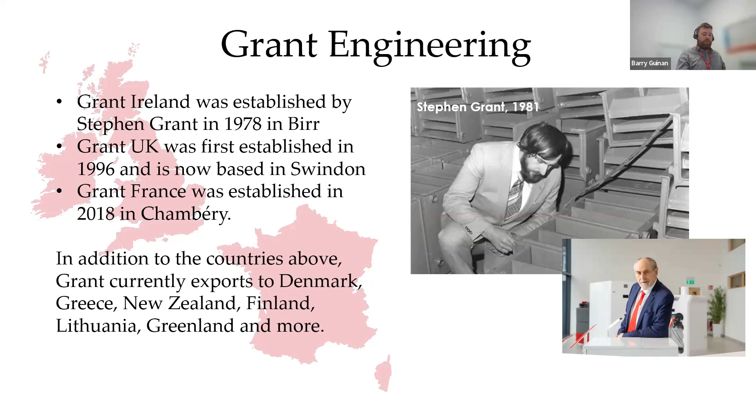First off, there's information required from the assessor. From your perspective as the assessor, you've gone out and done your pre-BER work and your assessment on the house. You've seen where the house is, in terms of what the existing HLI is, and then in consultation with the homeowner, you discuss what works are needed from a fabric point of view to get it up to the required HLI. Once you have your finished works BER at that stage, we need as a heating design company certain information in order to complete a full heating design for that homeowner.

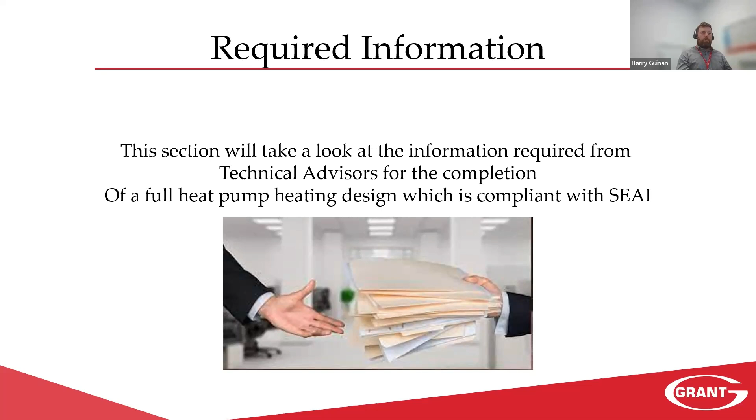The first and foremost thing we need when it comes to doing any sort of heating design is a set of plans. Now, I know from a retrofit perspective, plans are not always available, so a fairly detailed sketch is adequate. Once we can see the room layouts, the room names, the external walls, and what rooms are adjoining each other internally, that's good enough for us. It doesn't need to be a full-on CAD drawing, but if we can get something as detailed as what's on the screen, that's ideal.

You'll be doing your sketches on site anyway, so if those sketches can be provided, that is a great assistance to ourselves - we'll see as we go on. Sometimes a homeowner might just send in the dwelling report. The dwelling report will give us a fairly accurate idea of the heat loss of the building, but we cannot work out anything to do with the heat emitters from the dwelling report. At that stage, all we could advise on would possibly be the size of the heat pump. So in order for a full, accurate heating plan to be done, a set of building plans are required.

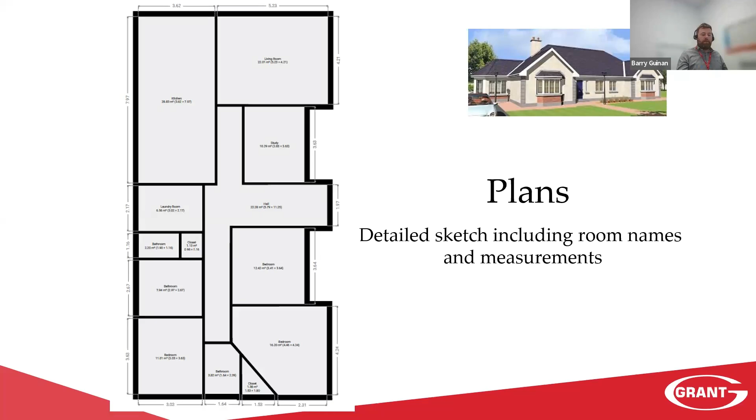We also need the windows. The windows are as important as the plans. A lot of the time you'll just get a sketch showing the living room, the sitting room, and so on, but you won't have any of the windows. As we know, in the last 10 to 15 years, glazing has really come on as regards sizes. There are situations now where in kitchens and living rooms, 70 to 80% of the surface area of the wall is taken up with glazing. So it's important that all the windows are measured and you have a full list of what rooms they're in, possibly even the orientation and the actual quality of the window.

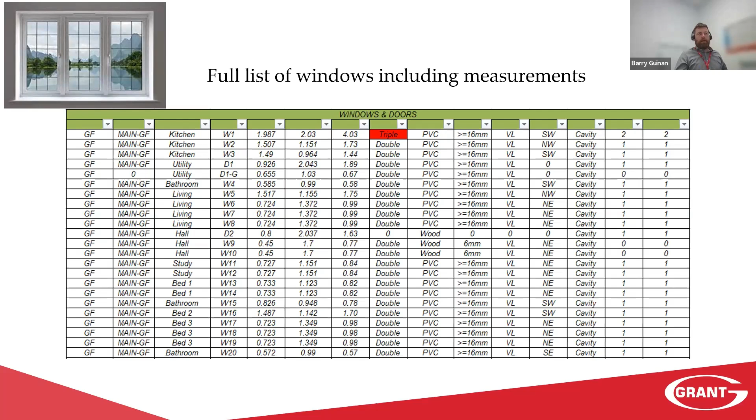The existing radiators need to be measured on site. In order for us to determine whether an existing radiator is good enough to remain in situ or needs to be replaced, we have to have that detail. So we need to know the size, the type, the spec of it. Is it a single panel? Is it a double panel, double fin, etc. That sort of information is important to be recorded on site.

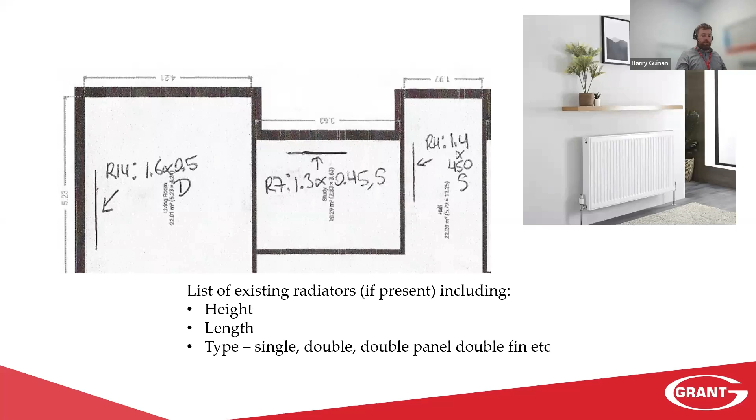We also need your post-works BER, so what that building is going to be from. When the final works is done from an insulation perspective, in order for us to do the heat loss calculations, we need to be able to extract the U values of what the house is going to be, as opposed to what it is today. So all the information we require we can extract from your post-works BER, from a U value perspective, air changes, etc.

So it is important. Just to summarize, the main things that we need from yourselves: we need your dwelling report, we need a plan or a sketch of some description, we need the windows, and we also need existing radiators. If you can provide a heating designer with that information, that's everything they will require in order to provide a full heating design which will be compliant with regs and so on, that can be submitted to SEAI. Those are the base requirements needed to get the process underway.

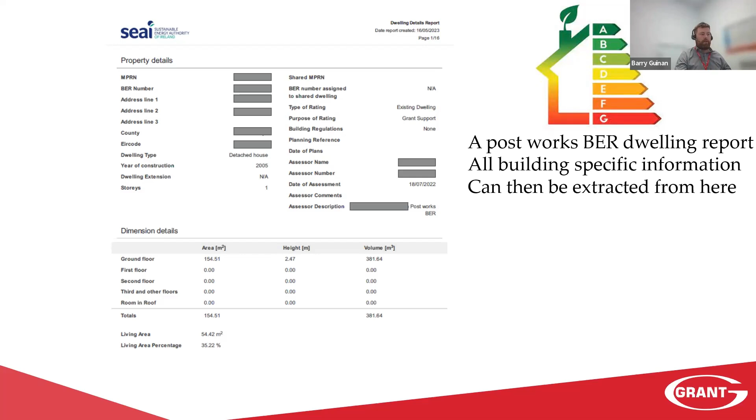From there, the main things with heat pumps, heat pump grants and actual heating in general is the actual heat loss of the building. The days of estimations are gone - guys looking at a room saying this size radiator will work here, or this boiler for there, or rule of thumb - that's all out the window. Everything has to be done on a room by room basis. Full heat loss calculations have to be completed in order to provide a full detailed heating schedule, which, as we'll see later, has to be uploaded. So it's crucial that it's done correctly.

So this section will just have a brief look at the heat loss, what it is, the actual calculation, and where the information you've previously provided is inputted, and why it's important to get it.

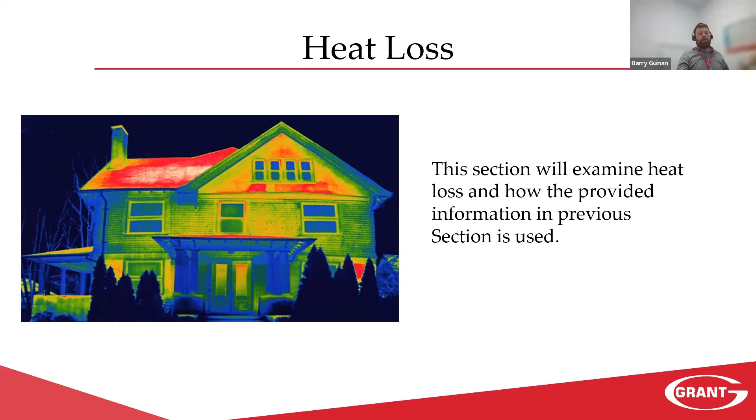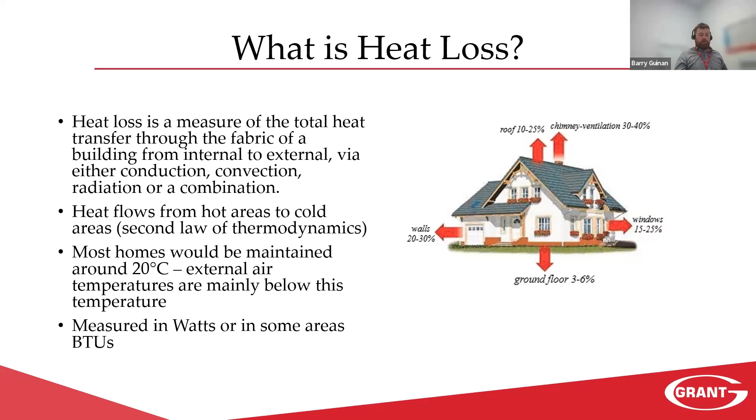Basically, as you're most well aware, heat loss is just the measure of total heat transfer through the fabric of the building from internal to external via either conduction, convection, radiation, or a combination of all three. Based on the second law of thermodynamics, heat flows from hot areas to cold areas. Most homes will be maintained around 20 degrees internally, but as we know, the external air temperature changes. Once we have a change in temperature from inside to outside, we're going to have heat transfer through the elements of that building. They're predominantly measured in watts nowadays, but in previous generations, in BTUs.

So the fabric heat loss is essentially the amount of heat loss through the physical elements of the building, such as your walls, ceiling, floor, windows, etc. The information required to calculate a fabric heat loss calculation: we need to know the internal design temperature, the external design temperature, the surface area of the specific element, and then also the U value of that element.

When we are designing a building or a retrofit, the element areas are generally set out by the homeowner requirements, or in the case of retrofits, they're physically already there. The temperature difference between indoor and outdoor is set by the design criteria and the climate. So as designers and heating engineers, the only value we can generally adjust is the U value. Realistically, we need to get the U value as low as possible in order to minimize our heat loss.

Now my computer is frozen. Apologies.

Oh, here we go, sorry.

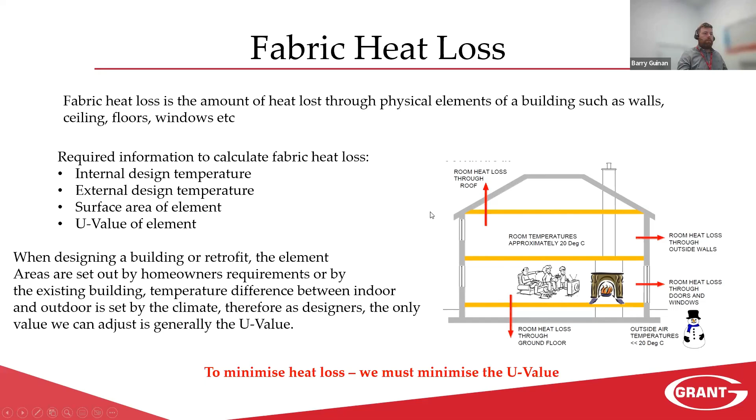So the simplified formula for heat loss is Q equals U times A times delta T. Q being our heat loss, U being our U value, A being our surface area, and DT our change in temperature. Everything to do with heating is dependent on the change in temperature, so our overall heat loss through the building is the sum total of our U values times our areas times our change in temperatures.

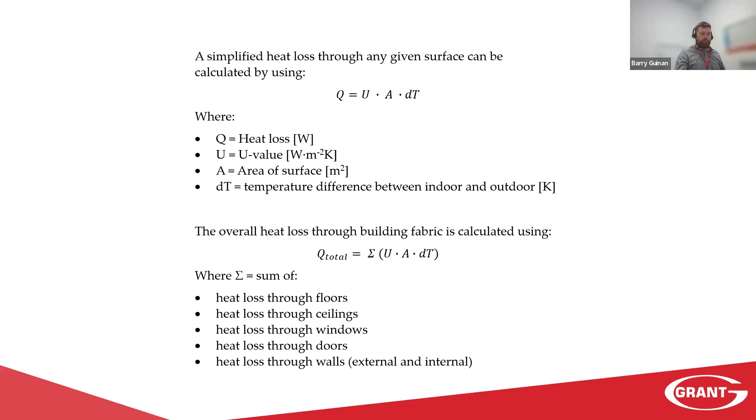The second part of heat loss is our ventilation heat losses. Ventilation heat losses are probably as prevalent as fabric heat losses, but in people's perception it's not really seen as a major source. Everyone can imagine heat loss through poorly insulated walls or windows, but when it comes to ventilation losses and air changes, it becomes harder for people to comprehend. You'll get discussion between a homeowner and installer like, 'you want me to seal up my house, but then you want me to put ventilation in the walls and windows.'

But basically, ventilation is a deliberate process of replacing air in a space to provide high indoor air quality. Because of designed ventilation rates, we can account for the heat loss provided through ventilation, so we'll know that X amount of watts of energy will be lost over a certain period based on the ventilation strategy of that room or building. Whereas air tightness, or infiltration, is the uncontrolled ingress and egress of air into any space through air leakage points.

If the infiltration is unknown, we can't account for that heat loss. That's why we need to get the building as sealed as possible and then add our ventilation after, which we can account for.

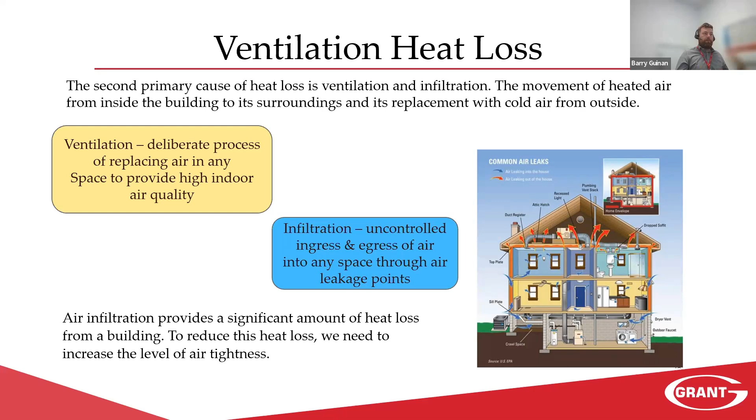The CIBSE Heating Design Guide and NSAI SR 50, 50-1 and 50-4, covering domestic heating, plumbing and heat pump standards, provide us with set guidelines for our internal design temperatures and air change rates for both new build and retrofit buildings. This is where all our values come from regarding internal temperatures and design ventilation rates.

The ventilation rates, although set, can vary - for example in a lounge, a new build is 0.5 and a retrofit is 1.5. But once mechanical ventilation and different ventilation strategies are introduced to a building, ventilation rates may change if the flow rates from the ventilation system are greater than what we've allowed for on the basic air change rate. So they can be adjusted.

Generally on retrofits, you probably won't adjust, because full-on air tightness and ventilation systems aren't as prevalent on retrofits. Also, if there are chimneys or open flues, the air changes would increase significantly. So from a heating perspective, it's important that any open fires are blocked, or stoves with possibly central air installed, just to reduce our air change losses.

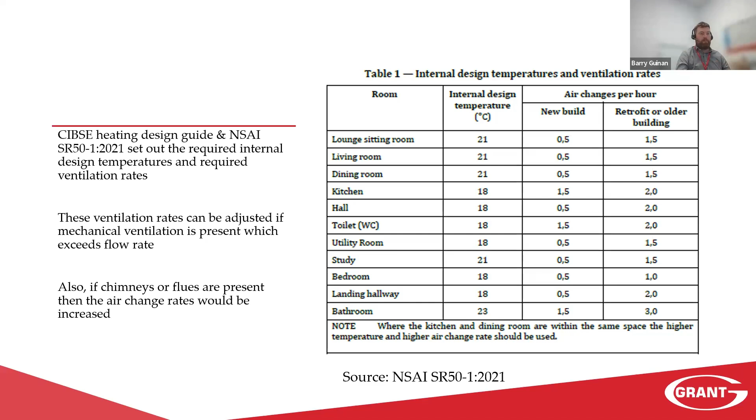As regards the two air change factors, new build and retrofit - the new build one is effectively since around 2011. So if you have air changes of 7 or below, or possibly 5 in some cases, you'd use the new build figures. If it's previous to that, or there's no air test, you'd use the retrofit or pre-existing building standards. You can have a retrofit, and if an air tightness test is completed, we could use the lower figures, providing we get a total home value of less than 5.

Just on the ventilation heat loss - the calculation is 0.33 times V times N times DT. Q is the actual ventilation heat loss, 0.33 is the combination factor of the density of air and the specific heat capacity of air, V is the volume of the room, N is the number of specified air changes taken from that previous table, and DT is the temperature difference between indoor and outdoor, also factored in from our previous table based on the type of room.

In Ireland, we take a design temperature of -3 throughout the whole country, so that's a constant. Whereas in the UK, if you're in South UK you'd probably use -1 as your outside temperature, while up in Scotland you might use -7. But in Ireland we just use -3 all over as a constant figure. And again, the total heat loss is the sum of the ventilation losses and the sum of the fabric losses.

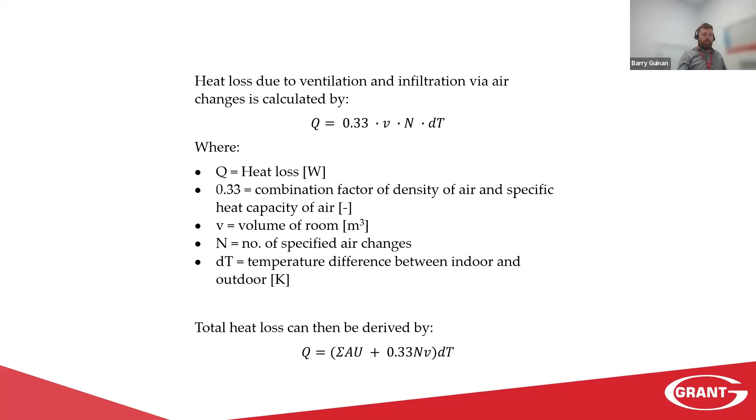One of the main things with heat losses is that every room has to be treated as separate, so it has to be a full room-by-room heat loss calculation. Each room is treated as a box, so 6 sides for heat loss.

Every room will have its own specific design temperature and air change rate. A bedroom will have a design temperature of 18 degrees and maybe an air change rate of 1, whereas a kitchen/living space would be 21 degrees and maybe an air change of 1.5 or 2, depending on conditions. So each room needs its correct values allocated, which goes back to the plan we receive originally. Unless the rooms are actually labeled and we know exactly what's what, we can't complete a proper calculation because of the varying factors that need to be applied to each room within the building.

Heat transfer will only take place when there's a change in temperature. So if you have two bedrooms side by side with a party wall in between, and both are designed for 18 degrees, there'll be no heat transfer through that wall, so that wall is excluded from your calculation. Similarly, in a 2-story building, if the rooms top and bottom are the same temperature, the same applies. So there's a couple of different bits and pieces.

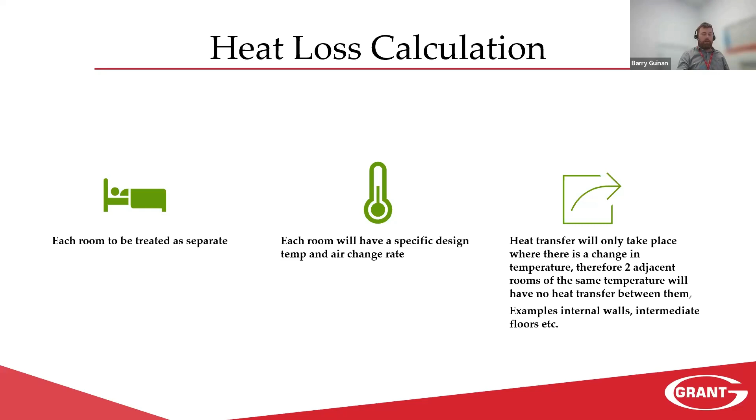So here we just want to look at a sample room-by-room heat loss calculation - what information is in it and how it's calculated. This is just an excerpt. Everyone would have different software packages - you can do them longhand, various different ways, but the methodology is the same. This one is just an excerpt from the SEAI heat loss calculator on how they actually do it.

That's the format they would use, and it can be downloaded online. As you can see, it's effectively broken into 3 sections. At the top section you'll have the room specifics - the name of the room, whether it's kitchen, living room, etc., your design temperature, 21, 18, 20, or whatever it may be. Our design external temperature in this case is -3, so our temperature difference is 24, so it'll be -3 plus 21.

The ventilation section comes next, so you can see the values that are inputted - our number of air changes, the volume of the room, length, width by height. Then we have our factors and our design temperature, so you can see our total ventilation heat loss given for that room.

Next we move on to our fabric - floor, windows, doors, walls, ceiling, all the different physical elements. You'd do that all the way across. There are areas, so it'd be net areas as well - obviously you'd be subtracting window areas and so on from walls. We get a total heat loss for that room based on the condition that we want to heat it at 21 degrees, and the air changes in this scenario is 1.5.

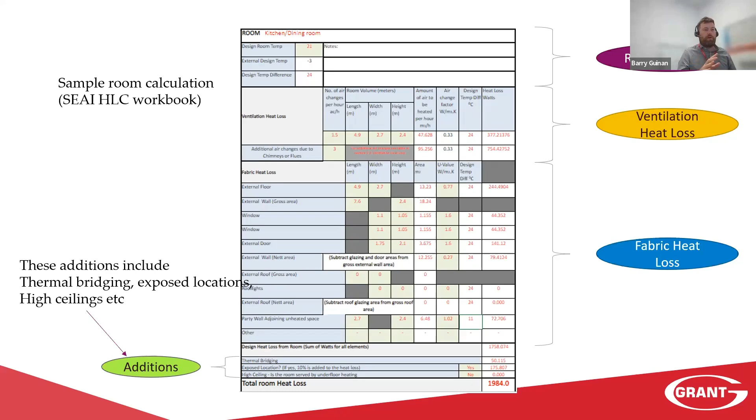So as you can see, if we revert back to what we looked for originally, in order for us to complete that calculation, we needed a plan with the room names and measurements so that we could decide what the actual criteria was for that room. We needed the window sizes, and we also needed the U values from your post-works BER. So all that information was required in order for us to complete this accurately.

So just to summarize on heat loss, because we don't want to spend too much time on it: effectively, in order to perform it, all that information is required - dimensions, windows, external walls, design room temperature, U values, air changes, and external temperature.

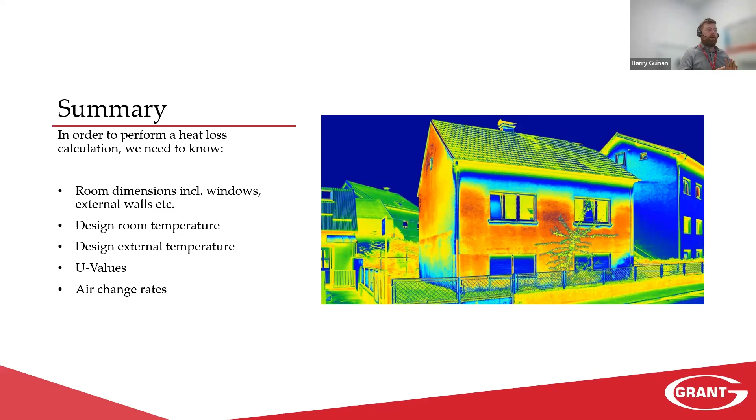So this is probably a section with a lot of issues that you'll run into when doing heat pump grant applications, when your installers are sending back information, or if you're trying to upload information to DEAP - what to actually look out for. So in this section, we'll look at existing radiators and how we actually calculate their outputs, where the information is coming from, and how you can derive it.

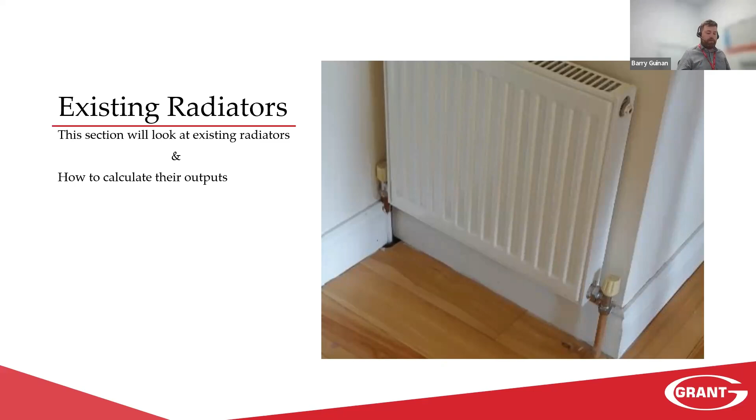So once you see in your DEAP manual, and also on the designer sign-off form, I think it's on tab 4 about the guidelines, it says that if existing radiators are used, please refer to the four documents. The four documents are essentially SR50-1, SR50-4, the Domestic Heating Design Guide, and then there's also the heat emitter supplement to the heating design guide.

So I suppose it's a combination of three or four if you count the two SR50s, but these are where the information has come from. The SR50s are more of a guideline, but practically how to calculate them, it will be a combination of the domestic heating design guide and also the heat emitter supplement.

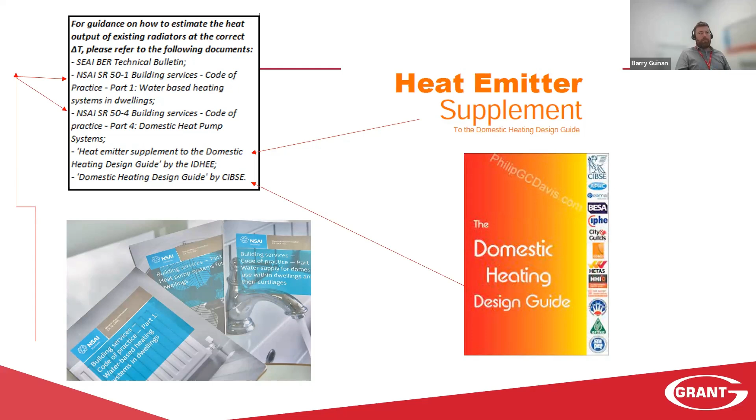So the heat emitter supplement is effectively a guide, and it has different types of radiators that would have been out throughout the years. This is just a screenshot of the first type that came up. So it's saying that if you have a radiator similar to a Stelrad Super, Hullrad, or Belkon, 40 mil wide sections, that would have been there in the 60s, 70s, and 80s.

This is the outputs of the different rads. You can see there were three types - a single panel, a double, and a triple - and then there were four heights given: 300, 440, 590, 740.

Barry, have we lost you there?

If it was a Grant rad, or whatever brand it may be, then you could use the data from them. But if the radiator is unknown - what brand and model it is - then you would revert back to this. As I said, there are various heights, types, and outputs. So what this supplement guide does is give you an output per 100 millimeter of radiator.

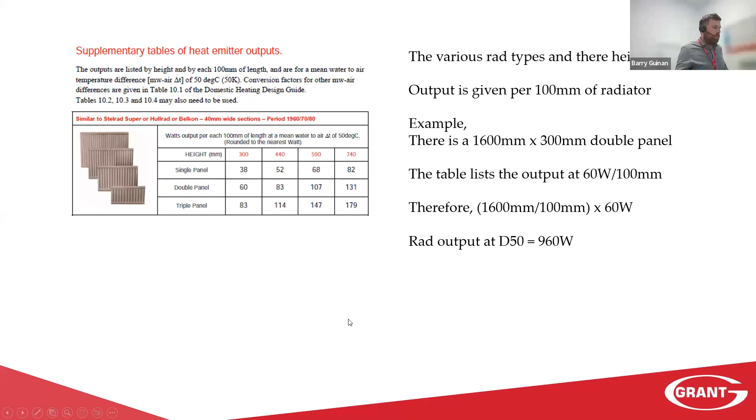Sorry Barry, we're having a bit of a problem with your sound there. Is this cutting in and out? Yeah. Sorry, no, just... Is it any better now, or is it still going? It's okay there for now. We'll let you know if it happens again. Thanks. I think it's a Wi-Fi thing. If we could cut the camera, maybe if it goes bad again. I'll maybe cut it now just to make sure.

Anyway, as we are now using heat pumps, we're not able to get them sorted for what output the radiators will have at those temperatures. So most heat pumps, standard heat pumps anyway, the max they can get to is a 55-degree flow. So we need to look at that very output there.

It's a combination of whatever your differential factor, a pipe connection factor, an enclosure factor - so the main one you'd see a lot of the time would be your correction factors for the various radiators. Essentially how that is calculated is it's the mean water temperature, so the average of our flow and return from our heat pump, minus our desired room temperature. So say if it's a bedroom, it's 18 degrees, or 21 in the living room, etc. The catalog then will have that listed.

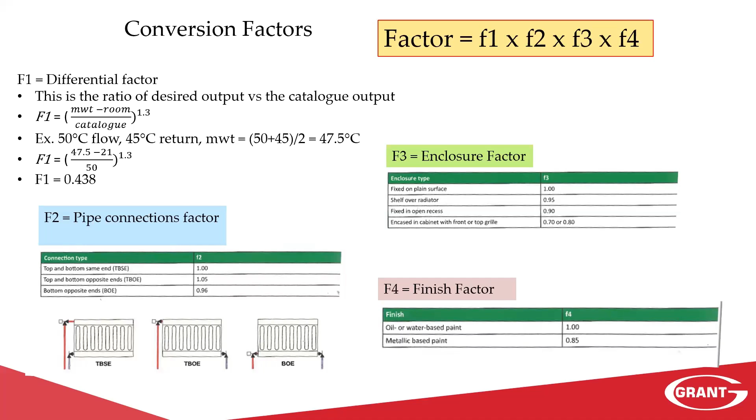Previously we worked out that after doing our survey, in the living room there was a 1600 by 300 mil double radiator from that time period. Now we want to know, if we operate our heat pump at 45-degree flow, what's the output of that radiator, and is it sufficient? So in this scenario: 1600 by 300 mil double, heat pump flow of 45 degrees, temperature drop of 5 Kelvin, bottom opposite end connections, on a fixed surface in the living room.

We calculated that the output at delta 50 was 960 watts. Our flow and return is 45/40, so the average is 42.5. Our room temperature is 21. So once we do our calculation of 42.5 minus 21, divided by 50, to the power 1.3, we can see that our F1, or differential factor, is 0.334.

Substituting back into the formula: our total output is 960 times 0.334, times 0.96 because it's bottom opposite end, times 1 by 1 for fixed surface and standard paint. That radiator will only give us 308 watts output. As you can see, that's less than a third of the output compared to delta 50.

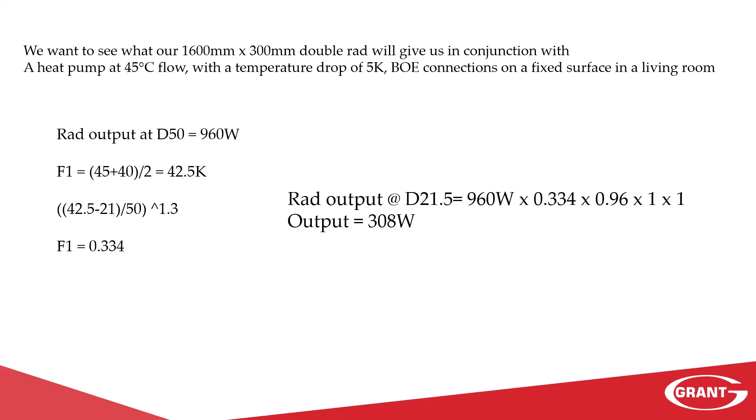So you'd do that across the board for the house, but essentially that's the formula and how it's done. It's relatively straightforward, and it would be repeated for every radiator in the house.

When doing a heating design, say we've done our heat loss calculation for all the different rooms in the house, and we have our full list of heat losses for each room. In this scenario we have a kitchen, bathroom, and bedroom, with heat losses worked out based on conditions, U values, and so on. We have 3 existing radiators: in the kitchen, a 1200 by 500 double; in the bathroom, an 800 by 600 single; and in the bedroom, a 1000 by 500 double.

Using our heat emitter supplement guide, we worked out the different outputs of the 3 radiators: 1788 in the kitchen, 768 in the bathroom, and 1490 in the bedroom. We want to run this system at a 48 degrees flow. So this is where we want the system to be, and if these emitters work at this, fine. If not, we'll have to adjust them, but this is our design parameter.

Based on that, we worked out our correction factor. Using the previous formula, with our 48 degree flow, 5 degree drop, so 48 to 43, we worked out our delta T's, and then our correction factor using the same formula. So now we can see what the output of the existing radiators are in those various rooms.

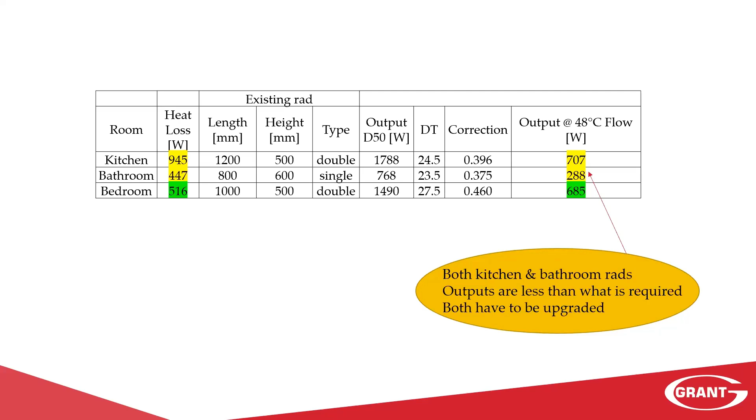In this scenario, we can see that at a 48 degree flow, the kitchen radiator, the existing one, will only provide 707 watts, which is short of the 945 required. The bathroom will only provide 288, which is short of the 447, but the bedroom will provide 685 versus a requirement of 516. So the bedroom radiator can remain in situ, it doesn't need to be changed. We follow this down through all the various rooms. This is how we work out whether existing radiators are suitable to remain or need to be changed.

At this stage, we've worked out the heat loss of the room and the outputs of the existing radiators, and now we have a list of what radiators need to be changed. So now we add new radiators to the rooms. New radiators are easier to deal with because the information is available - you know exactly that it's a Stelrad or a Myson or whatever it may be, and you'll have spec sheets to match up. So you're just reading values from tables, essentially.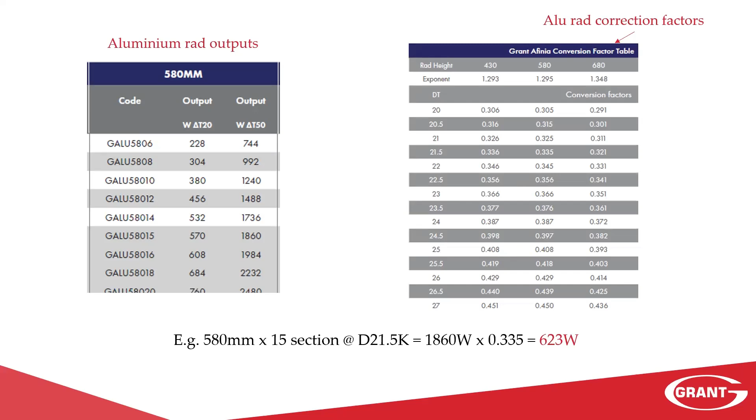So if we take out a 15 section, 580 high radiator, and want to find out the output at delta 21.5 - our output is 1860 watts and our conversion factor is 0.335. So our radiator under those conditions will give us 623 watts.

At this stage, we can start looking at the designer sign off. A lot of the time we would do this sign off once we have a system designed, to be able to provide that to the assessor or whoever's taking charge of the project for the homeowner - saying, this is the design conditions, and this is what needs to be done in order for the system to be submitted. The designer sign off effectively provides the system details and site-specific information related to that job. It details the system itself - the type of heat pump, size, the controls, the parameters, the settings, the flow temperature, the return temperature, the hot water setting, etc. I suppose a big thing is actually who the onus of the sign-off falls to. In most scenarios it's assumed that it's the heat pump supplier, but it's not - it's the actual person that designs the system.

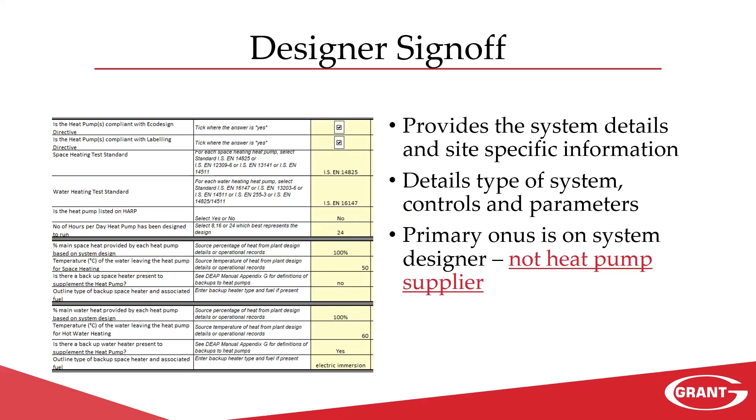As we'll see, the bulk of information required in the sign-off is actually the heat loss calculations, the radiator size, and the flow temperatures, etc., which are all dictated by the actual radiator system designer, as opposed to who just supplied the heat pump. Because in certain circumstances, an installer may design the system himself, go to the heat pump supplier and say, I need a 13 kilowatt heat pump, and they'll supply it. Then a homeowner might come back 6 months later and say, I need a sign off on your heat pump, but we didn't design the system. So there's lots of arguments and finger pointing. It's important to note that whoever designs the system is the person responsible for the actual sign-off sheet.

In order to use non-default temperatures, which is the crucial thing especially on new builds, we need flow temperatures as low as possible in order to get efficiencies up, so we can meet our EPC and our CPC and our renewable contributions, etc. For us to use non-default temperatures, our full heating design has to firstly be completed, and then also filled into the system.

As you can see here, an example of a completed one, where you'd have your room heat loss, type of emitter, the manufacturer, the model, the output - that would be what we've calculated our output to be based on the conditions. In this scenario, it was a 50-degree flow, and in the kitchen, it was delta 29.5. So our radiator there, a 2 meter, 600 high, type 22 double panel double fin, under that output will give an output of 1777 watts. That has to be completed all the way down. If this is not completed correctly to match with the flow temperatures, then we're not able to use non-default temperatures. So it's important this part of the process is done correctly.

But if everything we've covered so far is done, then it's a simple input exercise. It's important that all the steps are followed along the way, and then we can input all this information and be able to provide it to yourselves.

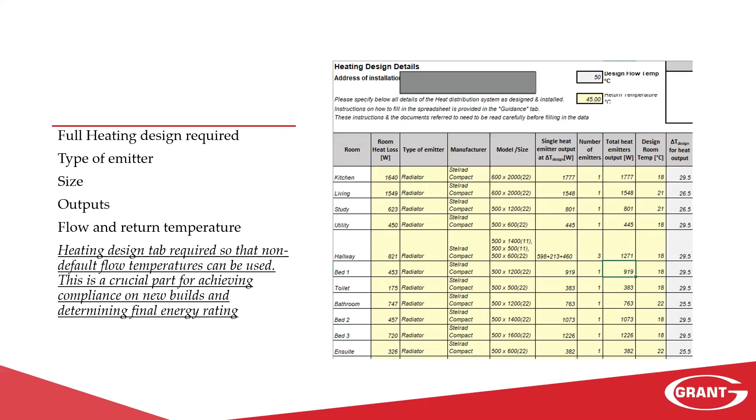This is a section in the heating design tab that came in maybe 2 or 3 years ago, possibly a bit longer now, and then this section followed. This is effectively where our conversion factors come from and what the outputs are and what the actual type of radiator is - this is the radiator, this is the size, this is its listed output, this is its conversion factor, and this is what it's actually given us. So we have our delta T, our radiator make, model, dimensions, the heat output from the manufacturer - that's your catalog output.

So it would be from your delta 50, predominantly from our radiator spec sheet - there we list that based on delta 50. If we had filled it out and it was from a spec sheet with delta 30 or delta 62, etc., we'd fill that in, and then fill in our conversion factor. This is either coming from the manufacturer who supplied it, or as we have calculated based on the formula we've seen earlier with the mean temperature minus the room over the catalog to 1.3, and that works out the actual heat output of that radiator. What you see on the right hand side, 1777, that needs to marry back over into what's actually fitted or filled in for that room in the previous slide.

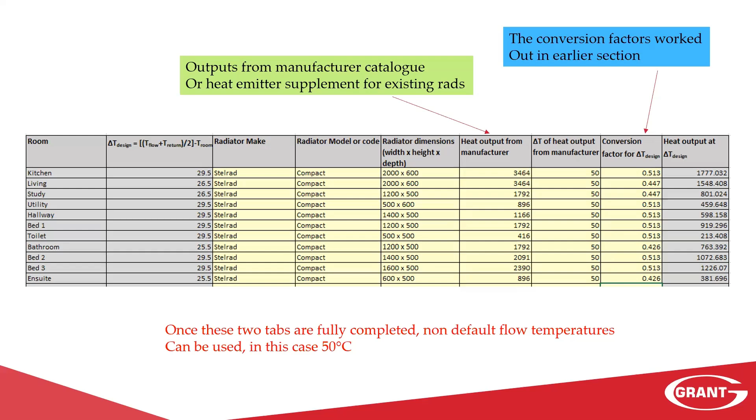Once we have got to this stage, we have our heating design completed and our radiator exponent tab completed. So now we're able to prove that the radiators installed will match the heat loss based on the flow temperature we want to use - here's the evidence behind it. So now at this stage, we can start using non-default flow temperatures. In this case, we're using 50-degree flow. So this can be submitted correctly to SEAI.

So just have a look at a case study of a project that was done, the information that was provided, what was provided back, and the end result. It was a 2005 built 3-bed bungalow, in reasonable condition at pre-works, HLI 2.12 and a BER of C2. It was being run by an oil boiler. You can see that the delivered energy at that stage was 24,500 units per year with 7 ton CO2 emission.

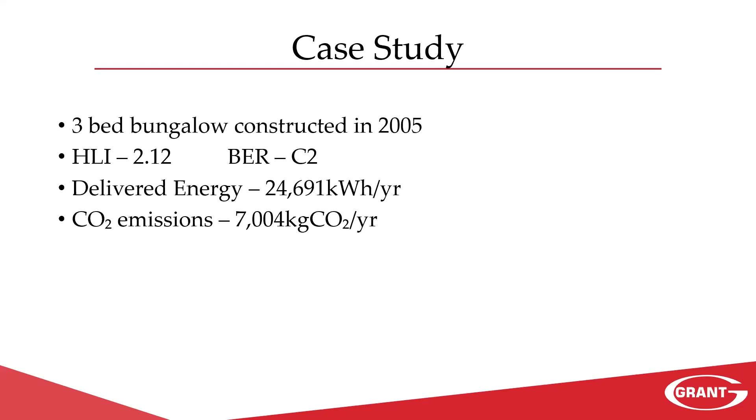We would have been provided by the technical advisor overseeing the project, in conjunction with the installer, a detailed plan. So we had the full plan of the rooms, external walls, full measurements. Then we also had a plan showing all the existing radiators, the sizes, the types, whether double panel or single panel, heights and so on.

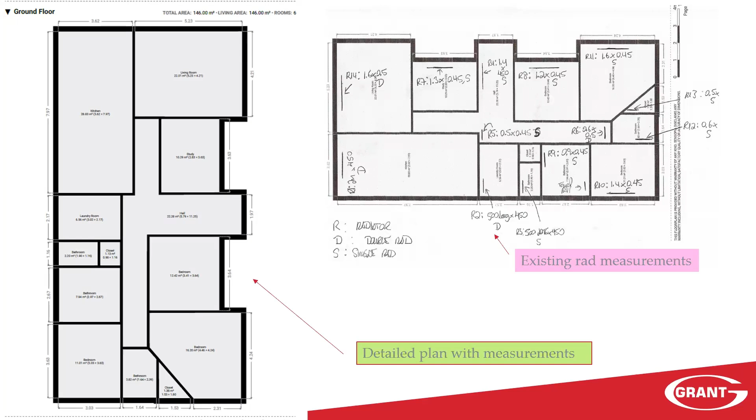We provided images of radiators just so we could physically see, because there's different types of double panel. You have the older version, which just has the 2 panels, but then you have double panel double fin, which has fins at the back in between. You'd also have double panel single fin, etc. So images of radiators allowed us to make sure the outputs we were calculating actually matched what was on site.

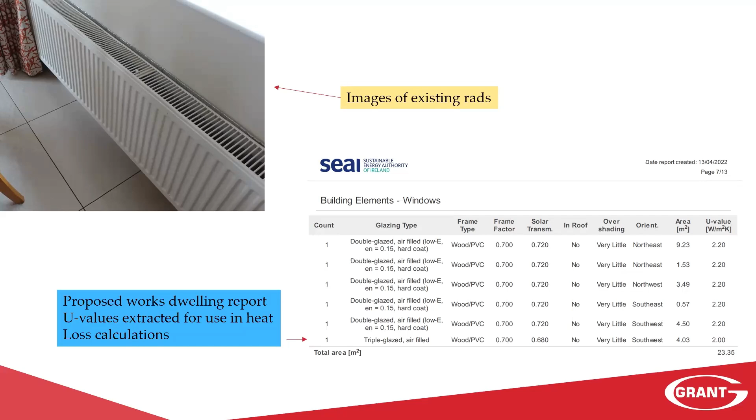We were also provided with the post-works dwelling report. From here we were able to extract what the U values were going to be once the heat pump was installed, so we could get the calculations as accurate as possible. Because if we didn't have the proposed U values and used the original ones, the system would be way oversized, leading to running cost issues and performance issues for the homeowner, plus extra costs from a bigger heat pump, bigger radiators, etc. So it was important to get the correct U values.

From here we were able to complete the full room by room heat loss calculation, work out the existing radiator outputs, and then supply the heating specification back to the assessor and to the installer.

In this specific scenario, when the homeowner was doing the works, they decided they wanted to upgrade all the radiators. It wasn't a requirement that all radiators in this project were upgraded, but while they were doing the works they wanted to upgrade everything and have a full new heating system from scratch. So you can see we're able to provide what the heat pump was, the tank, what sort of controls were required, and a full list of the radiators needed.

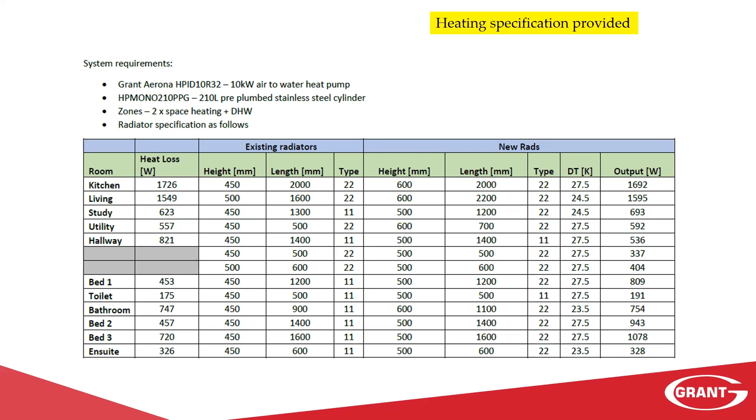From here, the process would be pricing and so on from the contractor, who then completed the work. Once confirmation was sent back that the schedule was followed, or if there were any modifications that we had to adjust our calculations for, we were able to complete the full heating design form.

Because we had designed the system, we were responsible for filling out this form - all the system details, the tests and standards for heating and hot water, what the system was designed to run at, the flow temperatures, the hot water, the control strategy, etc. We were able to fill in the system details on the radiators and so on.

As you'll notice, this system was done at a 50-degree flow. We would always try to get it as low as possible, so in a perfect world we'd do it at 45, but in some circumstances on a retrofit it's not possible because the radiator will physically get too big and wall space is at a premium. Predominantly the issues arise in kitchen areas and bathrooms.

Most bathrooms in houses built maybe 20-30 years ago may only have 600-700 mil allowed for a radiator, with units and baths taking up space. So we have to work with what we can - there's a bit of back and forth between the designer and installer on what they can physically fit. In this scenario, we slightly had to raise the flow temperature to 50 degrees in order to get the required radiators fitted, so everything could be certified, signed off, and proved that the heat demands could be met.

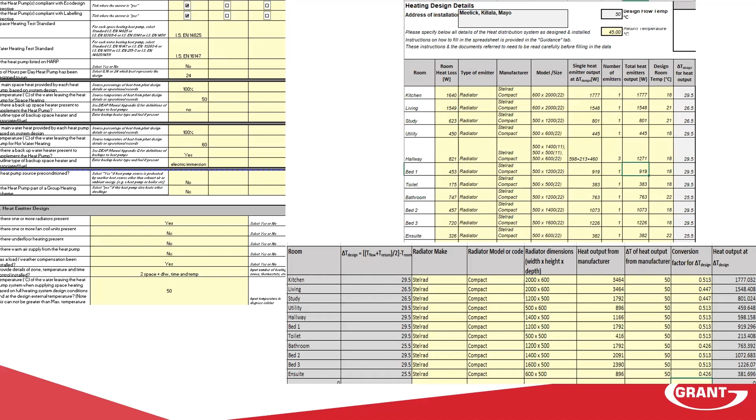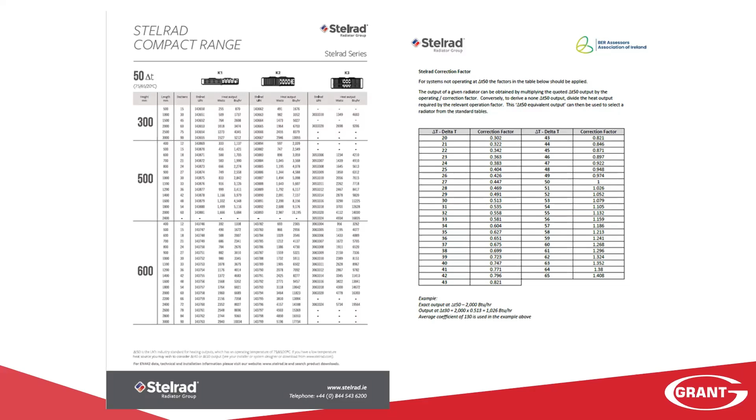So we would have supplied back then the full complete heating design sign-off, all the different tabs. As it was a grant-aided job, the installer had to physically sign the sheet, the SEAI registered installer. So the whole sheet would have been filled out, except excluding the actual signature. Then we would have supplied the radiator schedule, and the conversion factor tables used in conjunction with those radiators. We also had to provide the eco design data for the heat pump, and the product labels for the heat pumps and cylinders, etc. So everything required for compliance, and also for the assessor to input into DEAP to determine actual heat pump efficiency.

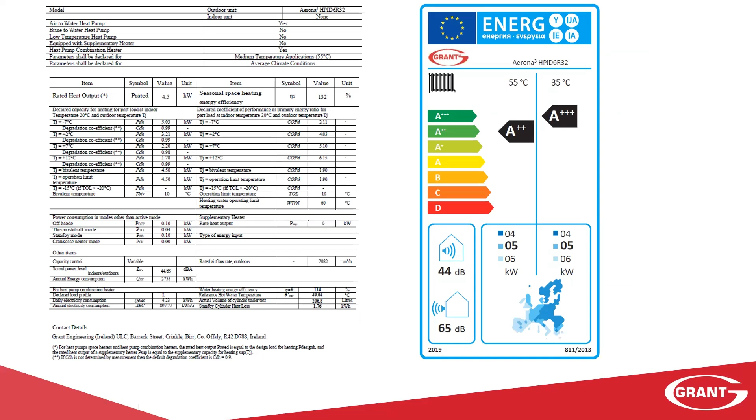So as you can see, once all the information was inputted into this project, the final HLI was 1.98. The design HLI came in at 2.14, which was just under the 10% allowance, which was ideal. You'll always find that the design calculations, our room heat loss calculations, come in slightly higher than the DEAP one, because we're taking individual rooms with different air changes and so on. So it'll always be slightly higher, but the key is to try to keep it within 10%. If it's above 10%, we'd have to give verification in writing that all the correct principles, methodologies and procedures were carried out.

But thankfully in this scenario, it wasn't required. As you can see, based on the flow temperature used in this project of 50 degrees, the seasonal efficiency of the heat pump came in at just under 460% for heating and 197% on the hot water, which we can see is well inside the guidelines for where the heat pump system needs to be in order to claim the grant, which is 300 for heating and 160 for hot water. So it was well inside of it.

This house then finished up, so it went from a C2 with a HLI of 2.12 to an A1 with a HLI of 1.98. The A1 was achieved via the installation of solar PV. So without that, it probably would have got to a B2, but there was very little fabric upgrades required. It was just basic attic insulation top up, and the HLI was able to be achieved.

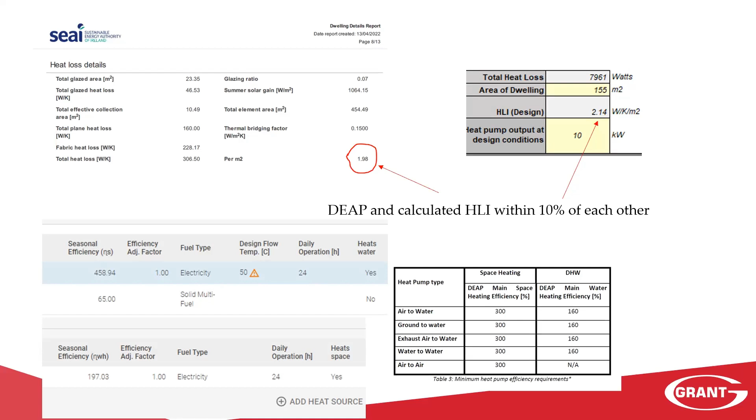And the home then is fully completed, all documentation submitted, commissioning forms, homeowner packs, and a quick run through with the homeowner. So the homeowner is happy with the system, it's operating as it should, all paperwork submitted on time, because all the steps had been carried over from start to finish. All the information was supplied that we required, and because of that, we will supply back all information that the technical assessor required in order to submit his paperwork for the homeowner.

And just to show why the flow temperatures matter, we need to get away from using default temperatures where possible. In order for the heat pump to be as efficient as possible, the flow temperature needs to be as low as we can physically get. 55 is the default, but ideally in a perfect world, you need it to be below that.

So just always try to push to get it as low as possible, and not use default flow temperatures where possible.